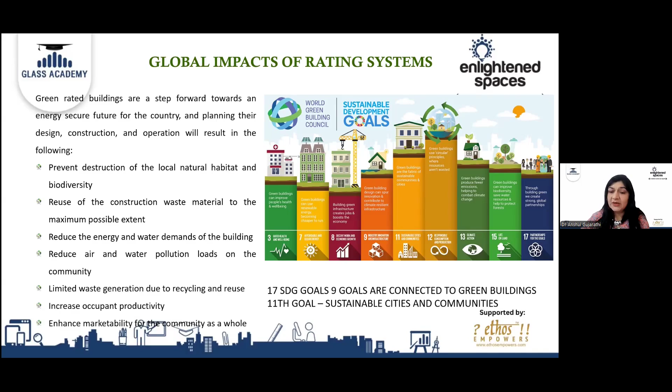Of course, the consumer awareness and demand is going very high, and we have technological advancements. Of course, the SDGs all set and remind us again and again how we have to go about it. I'm glad that many industries and corporate sectors are now directly getting engaged with registering individual SDGs and working focused on them. If we just browse through 17 SDGs, 9 of them are directly connecting to green buildings and infrastructure, wherein sustainability lies as one of the major goals.

Going further, we realize that there are some long-term risks also associated with the development, and it's not relating to one or two, but it's a multi-stakeholder risk that has come up. Amongst that, the environmental risk remains as one of the major ones, and we are actually facing extreme weathers. We are realizing disasters, which are natural and few man-made as well. We are anticipating a lot of biodiversity loss. Along with that, I would say the risk with technological advancements are also coming up and surfacing a lot.

We have realized water crisis in past few years, and now it's going worse. We have some kind of governance issues also coming up. And of course, economy is getting hurt because of this and coming up as a bubble. So looking at all these long-term risks, we really have to gear up for the challenges that are coming up.

And we were once upon a time, yes, I am mentioning it, once upon a time, we were talking of 1.5 degrees, climate change, climate reversal, and all these kind of things. Today, we are talking of 2 degrees, 3 degrees, and even 4.5 degrees. If we see COP29 coming up with certain things saying we have to be bold on buildings, do we actually realize how and where we are leading to with our technological, technical, and construction advancements?

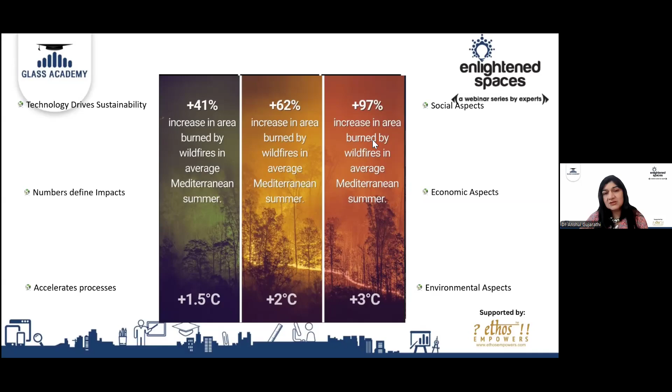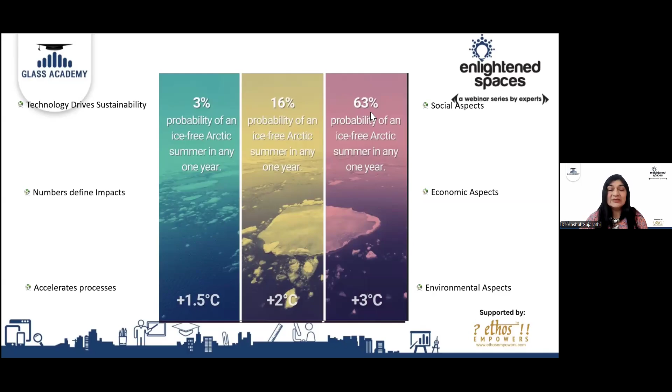And with all these numbers, we are going and racing with AI, where technology is not only driving sustainability, but it is also giving us certain numbers which are defining the impact, which is accelerating the process for certain efficient aspects, or maybe giving us the right roadmap. And we often realize that with AI coming up in a big way, we are still working on social, economical, and environmental aspects and talking of sustainability in a smaller way.

It's time for us to go from macro to micro and vice versa, from micro to macro. And of course, taking the tech-driven change, reshaping the industries, we have to drive sustainability in the most transparent way.

Friends, when we talk of sustainable development, we are talking of balance. Balance between social, economical, and environmental aspects, minimizing the impact. Every small development we are doing, we are actually creating an impact. Energy efficiency over the entire life cycle emerges as one of the major and most important goals of sustainability.

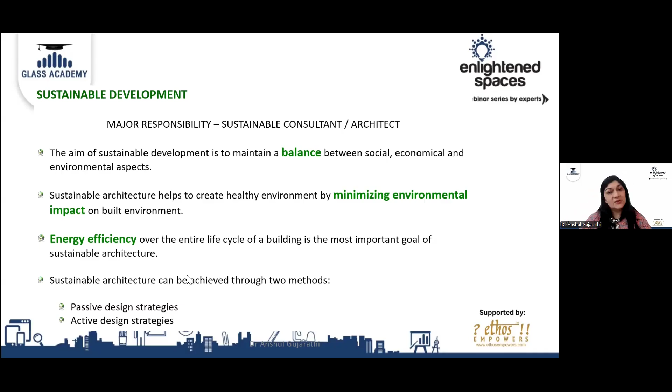And that is why we have to look at a long-term perspective and impact with sustainable strategies, including passive as well as active design and technological and services aspects. When we are talking green building, we are actually looking at minimizing the impact, energy efficiency, reducing energy, water, and managing them to the best of it.

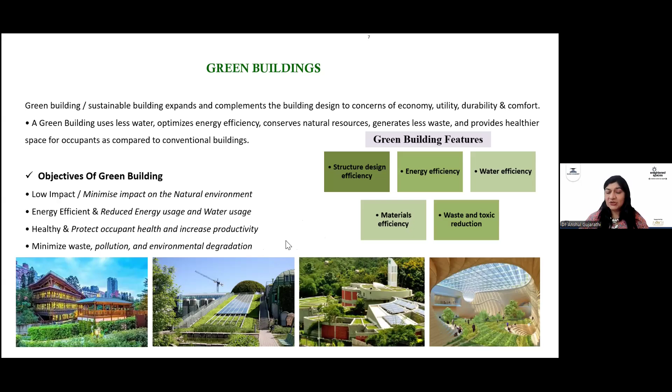Of course, talking of health, occupant health with enhanced productivity for all typologies, minimizing waste, pollution, environmental degradation, and of course, we are aware that green building works on basic 5 principles, which are very much correlating with our 5 elements in nature.

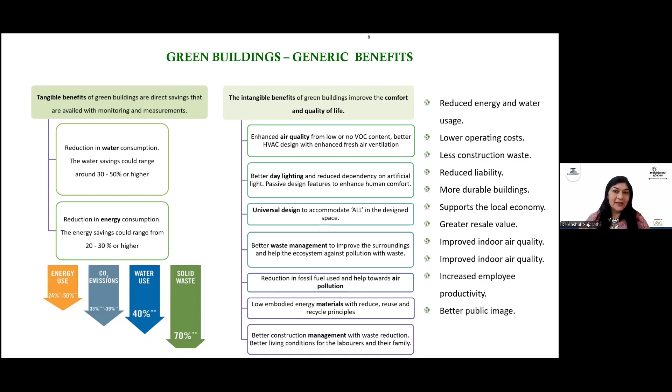Talking about the tangible and intangible benefits, we are realizing the tangible benefits with baseline consideration for almost every green building having minimum or mandatory requirements and compliances. With these mandatory compliances, we can actually anticipate a huge change. Friends, we just cannot take a building which is not sufficing even 20% saving of water. It's today a sin, and we have to take the risk of going beyond our comfort limits.

So India is pledging carbon neutral by 2070, and we are working for it today. We have worked for it for two decades, if I'm not mistaken, but with the race to go carbon neutral, we are looking at a very good roadmap. And of course, it's not we alone doing it. There are many other countries following the same pattern. It's not only construction, but as a whole, the corporate sector has geared up with their company's vision and mission, going towards ESG on a larger scale.

So we have been talking carbon footprinting, supply chain sustainability, certifications, net zero, green pro. We are having ESG reporting with BRSR, sustainability reporting, annual reporting with numbers known to everybody, life cycle analysis, and much more to go ahead with. So when we talk about all these ESG criteria, they revolve around sustainable basics, and environment, social, and governance aspects are concerned in totality. So you cannot be sustainable by just doing one part. You have to look at an integrated approach.

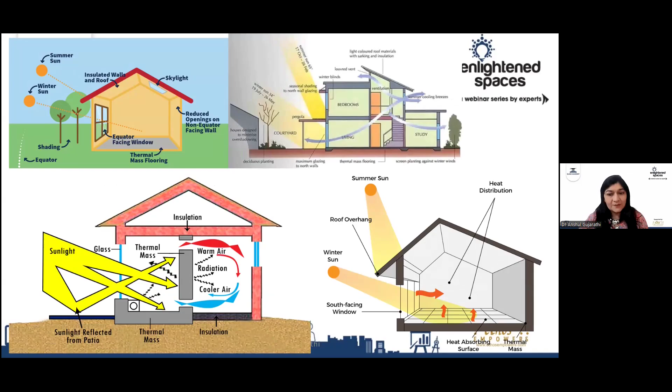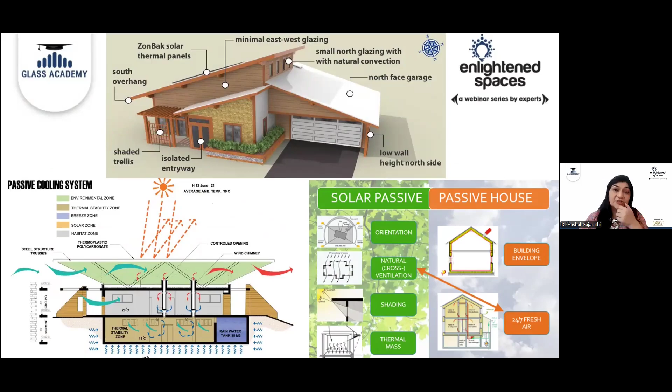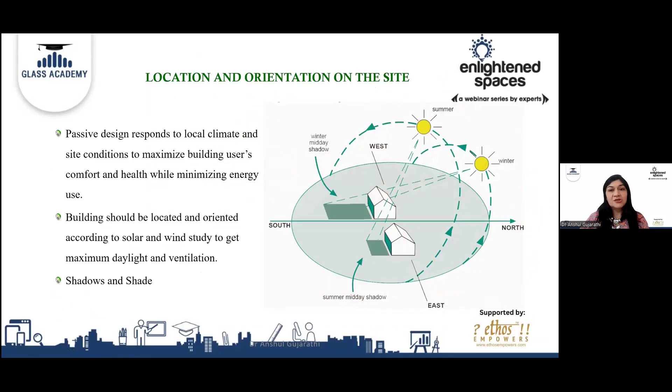Talk about how the sun is moving, how your overall passive cooling systems are designed. You're talking of how your buildings are being shaded with the right envelope, and of course the psychrometry that comes along. When we talk of location and orientation, it's important to understand shades and shadows because they play a very important role when it comes to envelope design. Strategies like courtyard planning, shading devices and others play a very important role, followed by cross ventilation, which makes a good effort for heat transfer as well as giving the right air changes for a comfortable space.

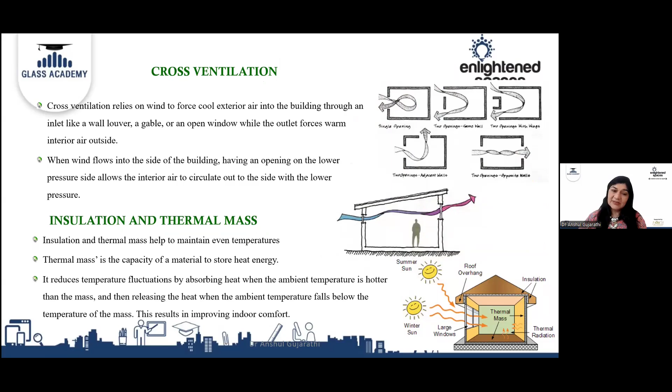We are talking of insulation, thermal mass, and many other things, for which we realize that one of the major materials responsible for giving the right connect to nature, the right approach to the envelope, a modern look, and also a material that is not only transparent but gives the right insulation indoors and outdoors - yes friends, thus glass becomes one of the very important materials we need to discuss. Glass has its own important aspect when it comes to solar passive design as well, because the envelope, which is not only leading to efficiency and comfort for the relevant climatic condition, is also creating the right connect for the end user or space occupier.

Because we just cannot live in silo and cannot have a disconnect from the environment, green building design and the right materials can be looked at to create the power of design. Architects, it's time that we look at uniqueness, functionality and purpose, along with moving away from stereotyping our structures. We all want the right satisfaction realized by the end users and our clients. And hence, if the structure is also cost effective - it can never be cost intensive if we are talking sustainability - and has the right happiness index, it will be long term effective.

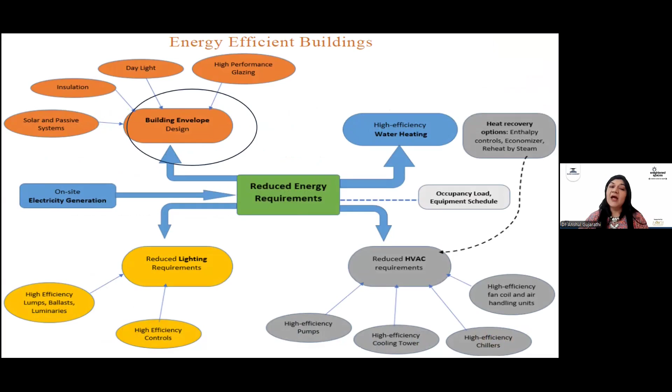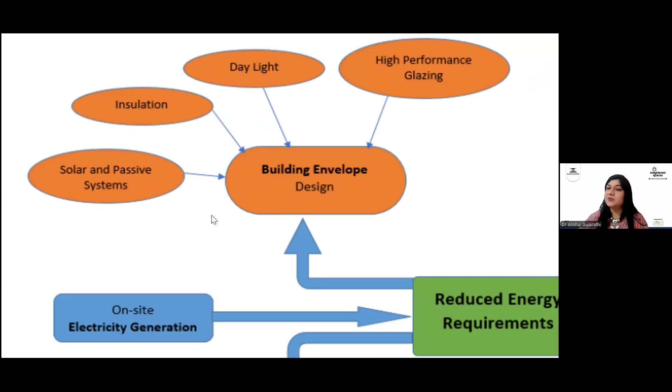Talking of building design, friends, when we are talking building envelope on a large scale, we are actually talking of four major elements associated with it. We are talking of insulation. We are also talking of daylight. We are talking of high performance with glazing and the opaque envelope, or the skylights that are there in the structure, and of course the solar passive and overall electricity generation in case if it is happening through the passive systems.

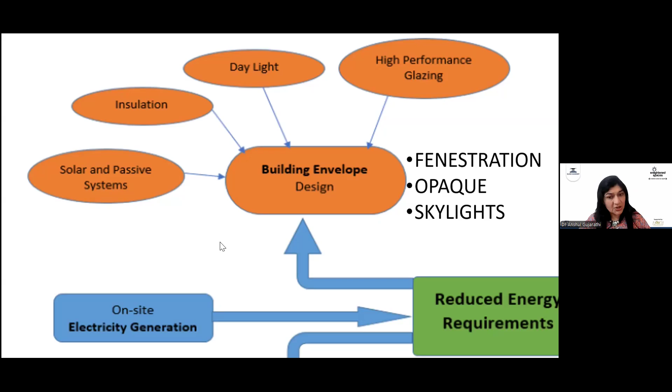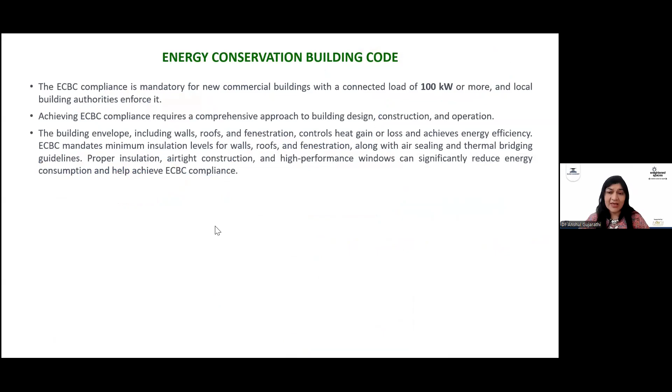Overall, taking into account all these factors, we can anticipate the right energy requirements for the project. When we are talking of ECBC codes, their compliances, or ECSBC codes, their compliances, we realize that building envelope also forms one of the major aspects in terms of overall energy efficiency. There are certain numbers which are predefined in the code. I would definitely love to also talk about ECSBC sometime soon, but for this, I think we can just continue with ECBC.

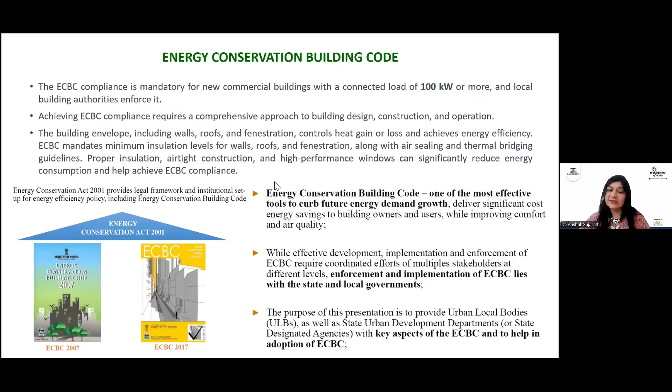It becomes one of the most effective tools to have the right compliance coming for the right climate. Also, talking of passive design features, including renewable energy system into the overall envelope also makes a huge difference. Today, we are having structures which are having PV panels embedded in the envelope, which are acting multifaceted. Of course, we are having also PV panels which are generating from two sides, and that is how they are also taking the right change with the technological development while we are exploring to use them the right ways also in the envelope.

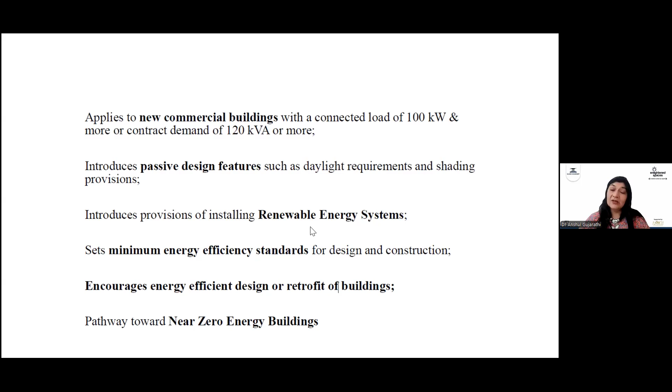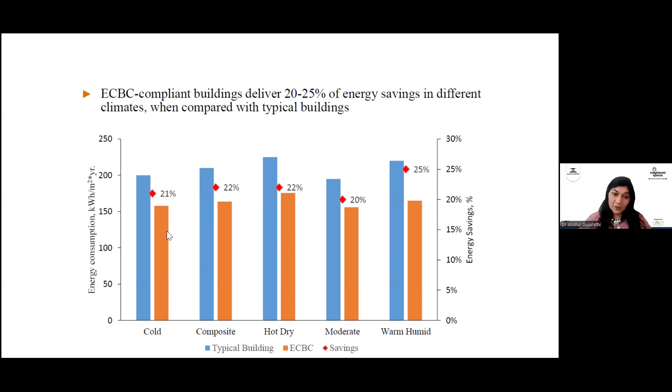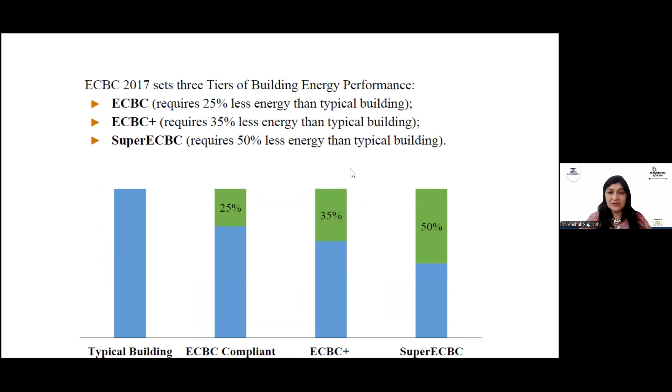This particular graph determines different climatic zones and how the ECBC compliant buildings are delivering the energy efficient way with the right reduction in percentages. We can also see that ECBC, ECBC plus and super ECBC requirements in terms of energy savings when it comes to typical buildings or the conventional buildings. So yes, taking the right compliances and choosing the right materials can give us absolute wondrous results.

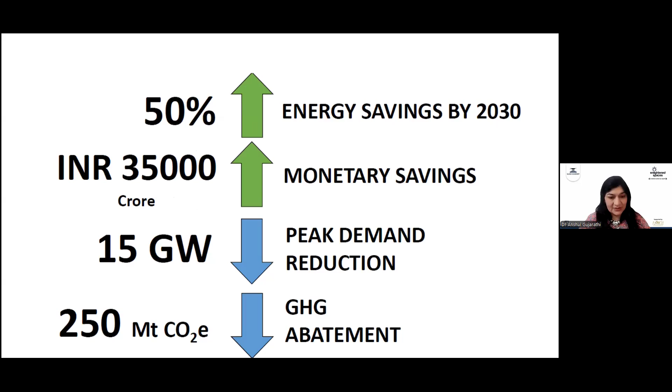And if our buildings decide to go ahead with that, we can anticipate a huge chunk of energy saving by 2030, which can go up to 50%. Of course, some kind of numbers are associated with it in terms of monetary savings, peak demand reduction, and of course, the GHG abatement. It's a voluntary rating program, and there are other certification programs which are directly taking ECBC as a base for their own compliances. May it be GRIHA, BEE star rating, IGBC, LEED, and even ASSOCHAM GEM for that matter will use ECBC as a reference code.

Coming to the very important and most aspired material, glass, and talking to it in the Indian context. Friends, when I was told that I have to give this seminar also touching base upon ECBC and also talking about glass and retrofits or even the use of glass in any new project, talking of phases of design process, I found this very important and interesting study during my PhD.

It was realized that the level of design effort with energy and cost division is very, very low at the programming stage, while it is maximum at the occupancy stage. But the potential of saving in terms of cost and energy is very high during the programming stage. If this is done the right ways, occupancy stage cost and energy saving reductions are realized to be very, very low. And that is how you end up giving a lot of saving potential. So the potential goes down as you delay your overall process.

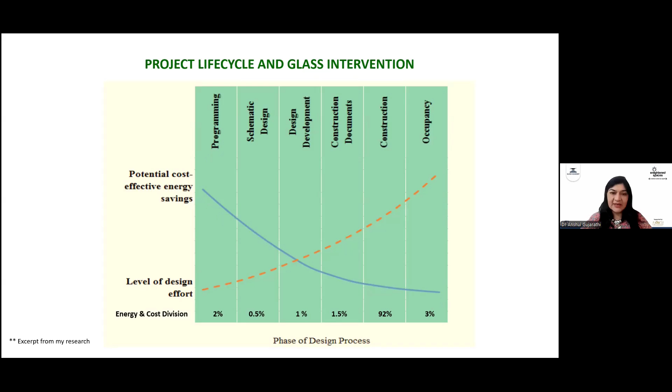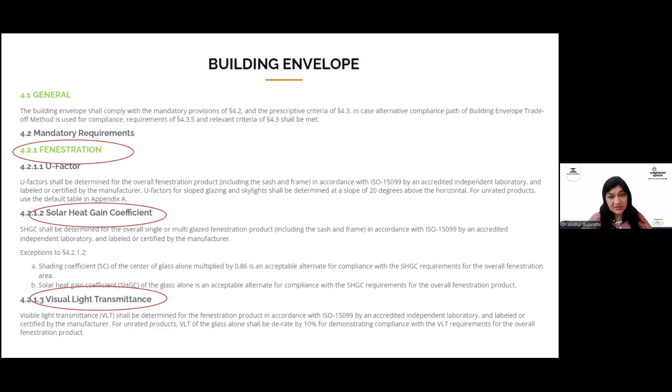Also, this has been highlighted in the ECBC that when we are talking of the material glass, we have to look at solar heat gain coefficient. And when we talk fenestration, SHGC and VLT play one of the major roles in choosing the right glass for the right project and the right level of the project height.

We often confuse that if the project is having ground floor glass application, maybe we use a simple glass not having the right VLT because probably sunlight will be a very difficult task to reach that place. So we are aware that we are designing in the wrong ways. So friends, it is important that we have the right angle, and I would say the angle of obstruction has to be realized right at the design stage for all buildings. Each and every window or the fenestration has the right for sunlight to come in.

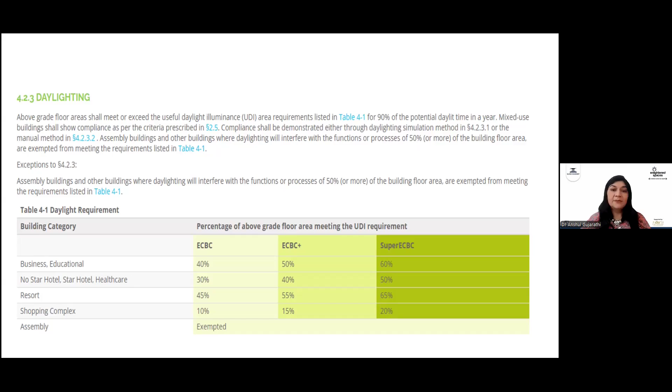And definitely it's a good idea to use different kinds of glass in different faces or different levels, but it should also match your compliance aspects for the project. So friends, taking the right SHGC and VLT for the right climate and the right project will make a very big difference. I want to share a very interesting case study here, which is associated with a retrofit case.

This building is a very well-known building right at the heart of Shivajinagar, Pune - Lokmangal building, which is nothing else but Bank of Maharashtra. So every person entering or leaving Pune knows this landmark because it has been a pickup point for travelers for a very long duration. This 46-year-old structure is now a green landmark.

When Bank of Maharashtra decided to go for a retrofit, they wanted to retain the identity of their building. And that is how they always remained with the same type of envelope. The design should not change, the identity should not change, but they would definitely make a landmark building because the inner side of the building, the indoors, would actually define the greenness of the project.

Today, this IGBC Gold certified project has 35.45% annual energy savings, out of which 42% of the entire connected load is coming from solar energy generation on site. The solar PV panels, installed on the building terraces, are actually doing the magic.

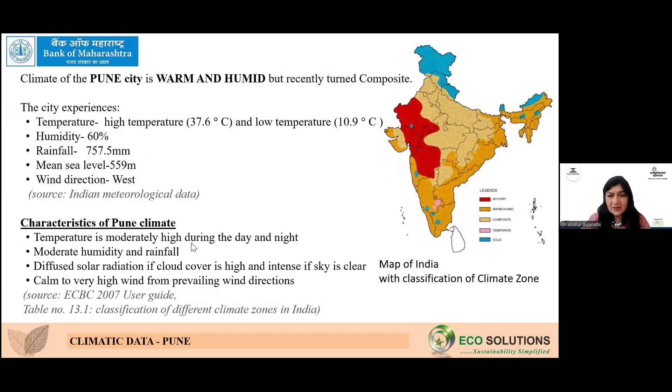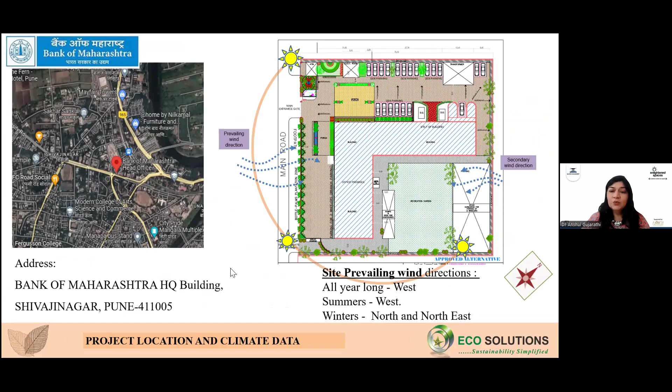Talking of the Pune climate, yes, we did a lot of study. And with that study, when we realized that being the main road, we have to understand how the sun is actually moving in the entire campus. So sun path analysis was done, wind analysis was performed, and with all these base studies, the overall envelope of the building was designed with certain strategies that were adopted.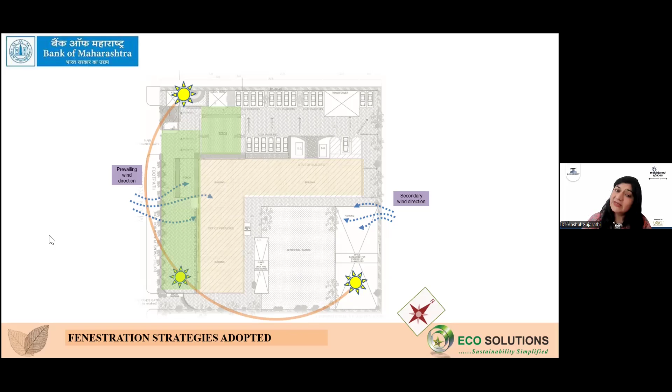Considering the prevailing wind directions, certain vegetation was proposed. It was not possible for the team to actually plant trees because it was a constructed site and they had limitations. So they went for very huge vessels to plant the right amount of trees. The construction area remained the same, but it was designed to have the right landscape at the entrance area with green patches to control glare as well as dust coming from the main road.

This side glass, coming from the roadside, had minimum glass, and noise barrier was one of the major aspects, and the glass chosen was with low VLT. Because the visible light transmittance coming from this side was not required looking at the inner activities as well. They have a major atrium here, and they have connected this atrium to the abutting landscape in the right ways.

Another section where they did not have the sun causing the right impact - the west side, I would say, the glass chosen was with high VLT and maximum glazing is realized on this side. Even the chairman cabin and managerial cabins have L-shaped glasses, and this entire zone has the right use of glass with maximum VLT coming in.

This side, which is the northeast side, to be precise, they have another construction activity going on, and the land is also occupied, so there was no view possible, and due to the adjacent building, high VLT and vision barrier is also created. But of course we need good light also coming in from this side, whatever possible. We have this parking area designed in the northwest side, and that is why this is a low-heighted area, along with some kind of ingress for light possible due to the gap.

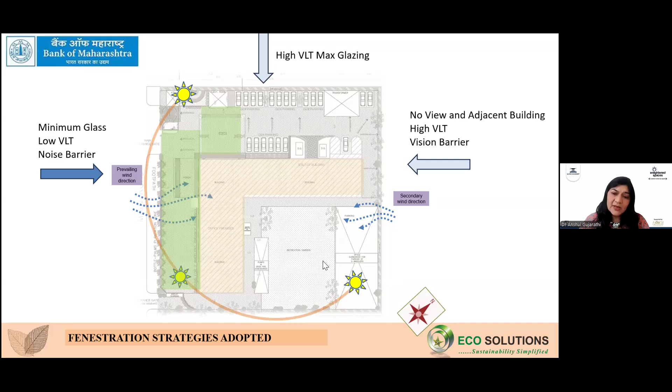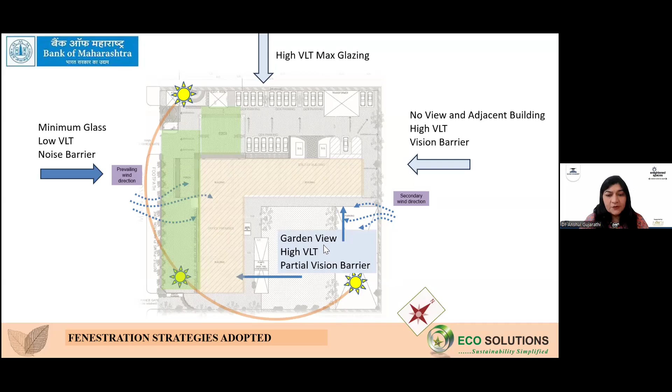With this, the northeast side also has a lawn, and that is why high VLT glass was utilized so that maximum light can enter the spaces for daylight and good working. So garden view with high VLT and partial vision barrier was chosen.

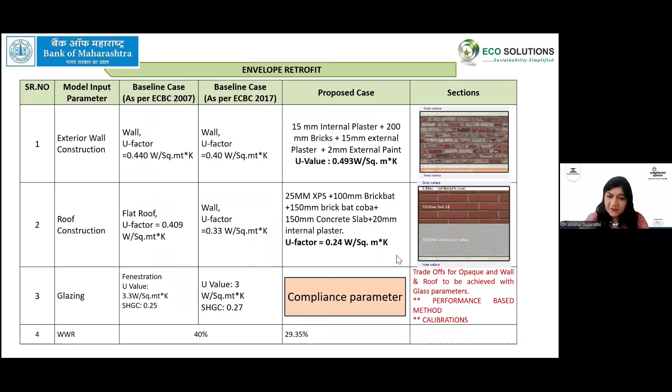With the right approach in the choice of glass, we were having compliance in terms of glazing for the proposed case, and we could score a good amount of energy savings against the ECBC baseline in terms of IGBC EB as well.

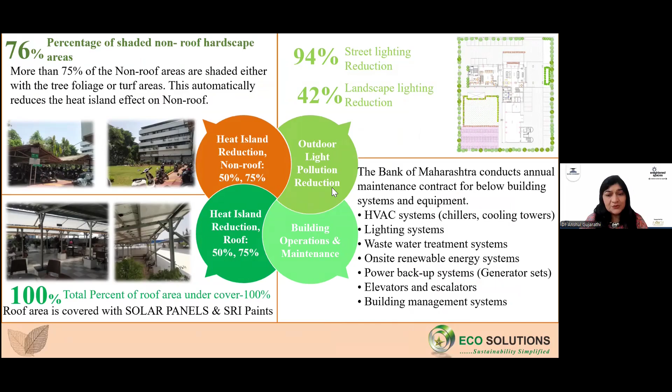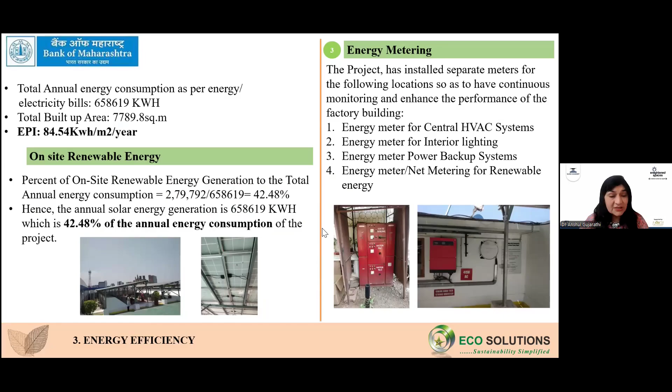A few other strategies we had: heat island consideration for roof and non-roof areas, outdoor light pollution reduction, and building O&M, since it's an occupied building with ongoing strategic working for many years. The EPI was realized, on-site renewable energy was realized, and we have a good metering system for overall monitoring.

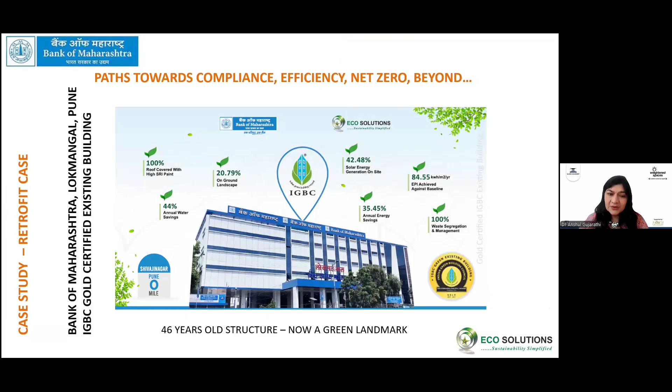Yes, the building is now all set to go towards net zero and beyond zero. Looking at all these factors, when we talk of a green landmark, we realize that glass makes a big difference in the overall design, and that is how the right credentials are achieved by the project.

So this is an IGBC Gold existing building, having good green features rightly displayed in the overall process. Apart from all these things, an ongoing thermal comfort survey for the occupants is a regular practice.

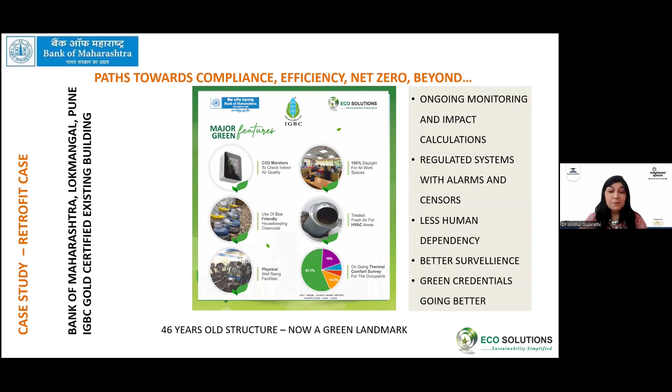There were additions of treated fresh air units for HVAC areas, and CO2 monitors to check indoor air quality as well, and lots of other things with less human dependency, better surveillance, and good green credentials going towards betterment were realized.

So friends, definitely technology brings tangibility to sustainability. And when we are retrofitting, it was realized that technology can also help us create a better module.

Let's see, when we talk of technology also creating better help, we ideally have started defining our paths with projections. We are going ahead with projections, and technology is aiding a faster path to our sustainable aspects.

Technology, in terms of using the right software to give projections, giving a systematic approach with monitoring, digital decarbonization, tech accelerators, and advancing the sustainability goals, all with various products available in the market, giving us the right numbers with CO2 reduction and different monitoring aspects.

All of this, we realize that we can today make a digital twin out of our physical twin, and represent models and manage not only our data, analyze them, but also do the corrective actions.

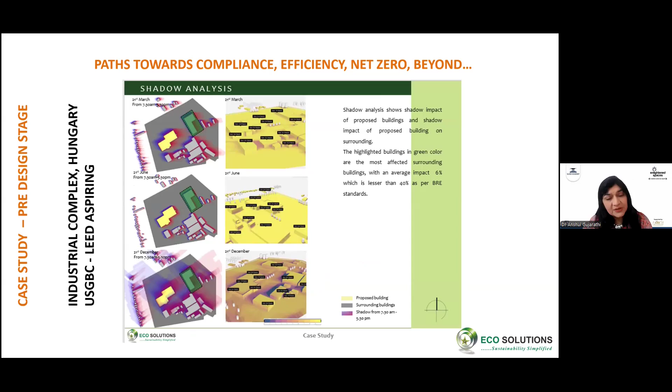So the challenge remains here, and we started with shadow analysis, not only for the new project but the existing buildings as well. The shadow analysis actually gave us the right application strategy for the overall new building, as well as retrofitting for the previous campus buildings to have the right type of shading strategies for this climatic zone.

Apart from that, we did certain wind analysis wherein we could understand that in this certain climate, we need winds from these sides to support our structure.

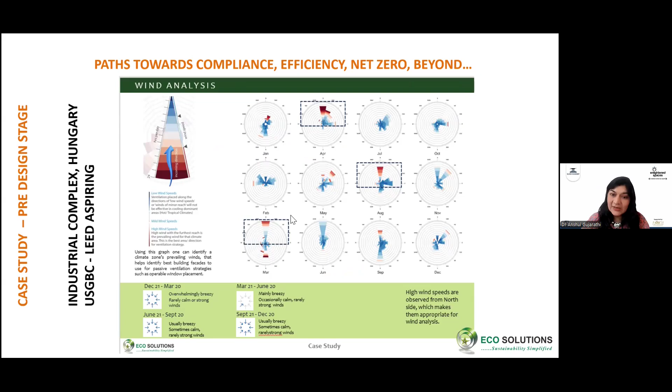Being a manufacturing unit, we had a lot of limitations when it came to overall use of winds and air changes. So ventilation was designed with the right aspect, understanding the overall wind movement in the overall process of the campus.

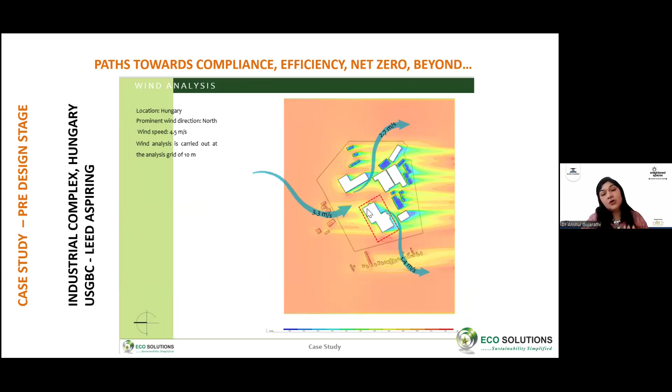And when this was done, prevalent or prominent wind directions, as we identify them, were taken into consideration. We did propose certain windmills also, which were permitted in such kind of zones, and we could actually analyze the renewable aspect for wind as well as solar in this particular project.

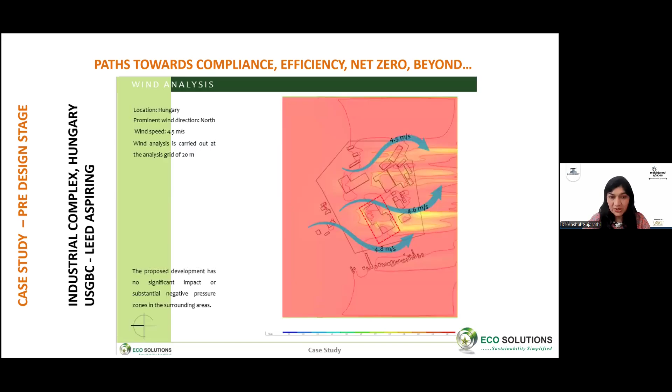Taking daylight into consideration in depth, we had to take up individual spaces, their activity requirements for daylight, and accordingly the lux levels were defined and designed.

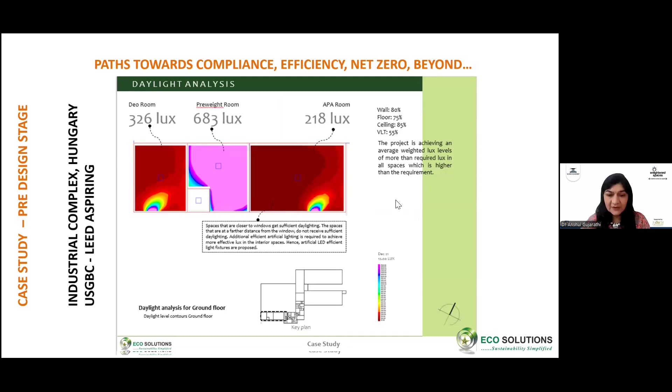Taking urban heat island into consideration, the Universal Thermal Climate Index was studied, and we could actually identify the overall reduction in site temperatures. So friends, being in our country, we often talk of reducing temperatures to attain the comfort zone. But going into other climatic zones, we also need to understand whether we really need to only reduce the temperatures, or balance them.

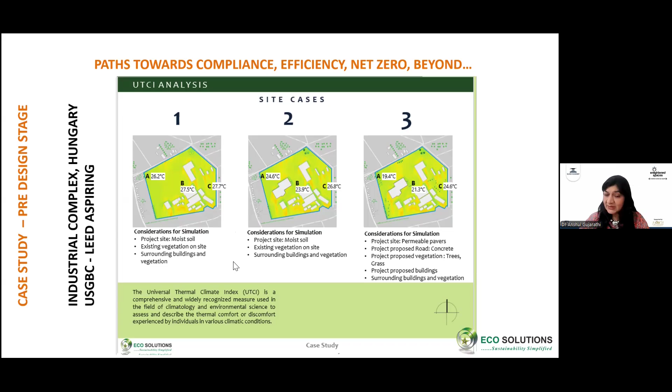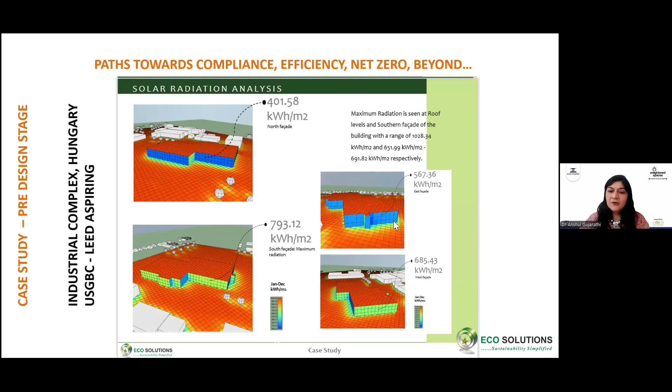This challenge remained to balance the temperatures in this overall campus. Hence, land planning strategies also came into picture here, and they were studied with the right aspects. Talking of solar radiation analysis, which was performed so we could suggest the right envelope for the overall new building as well as retrofitting of the old building.

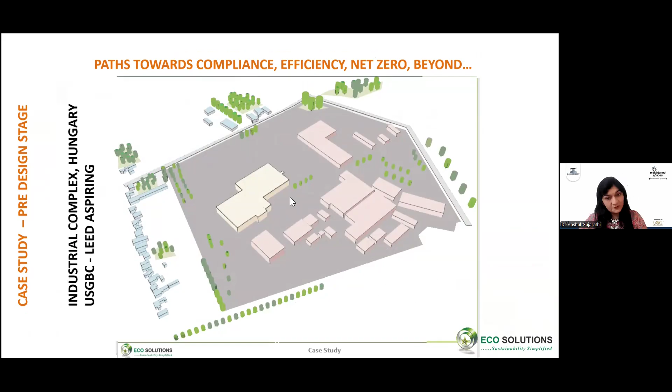It was studied with the overall performance of this particular simulation software. So friends, taking this project further, we realize that the overall campus can give you a very efficient working when it takes the right glass into choice, and the overall material aspect is also looked into, giving a perfect envelope.

As we continue to the next interesting project, one project which started as IGBC new buildings did not have enough amenities, and that is why they lost the platinum rating and landed in gold rating. But the clients were never satisfied. They said, let's wait for a year and go for existing buildings with platinum. And not only stopping at platinum existing buildings, they are now on their journey towards triple net zero. They are on their certification journey for triple net zero, but the project has been running triple net zero since its inception.

Location is in Pune, not a very huge project, but handling a very important logo with it. It's BMW Service Center by Bavaria Motors.

The energy consumption reduction, only through solar passive design and right choice of glass, was 20%. Water consumption was reduced by 60% against the baseline. They don't take any water from outside — it's a well which actually gives water to the project, and the well also recharges and soaks back the water coming from the rain.

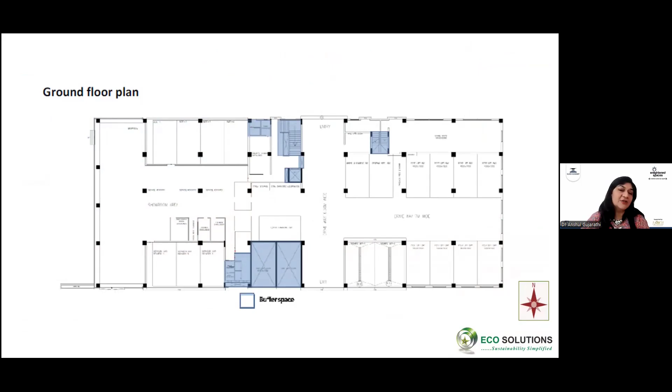Talking of their ground floor plan, I'm trying to highlight how glass can take a big leap in the overall design. A few activities that were planned which required air conditioning were actually on the west side. With this, we decided spaces in the south would be semi-air conditioned, or mixed mode ventilation.

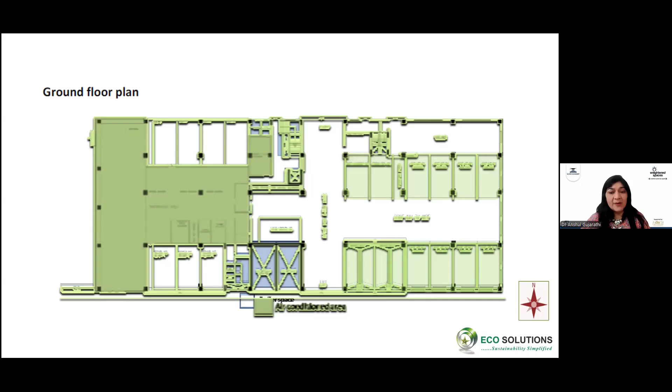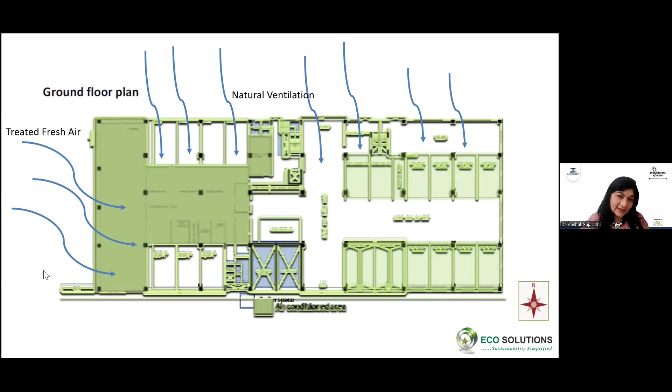Apart from that, looking at air movement in the overall project, there were treated fresh air inlets given from the predominant wind directions, and natural ventilation for all other areas was well designed. When talking of natural ventilation, there was ensured cross ventilation also happening with area divisions.

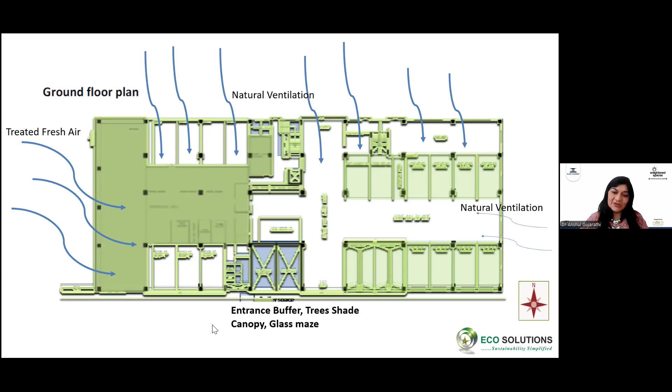Entrance buffer, tree shades, canopy, glass maze — these are a few important strategies when it comes to solar passive design for this project. This important elevation was created with a maze of glass having different emphasis.

As we go to the elevation side for G+2, there were different zones in the overall project — HVAC zones, shop floor, service floors for the cars, and some were just parking or treatment in terms of grease working or automation working or something like that.

So this entire project was divided into zones, and according to zones, wherever HVAC zones were there, glass with low SHGC was used, where VLT was slightly reduced. While the shop floor, parking floor, or service floor, where there was no HVAC and only ventilation was prevailing, the VLT was made high for that particular glass.

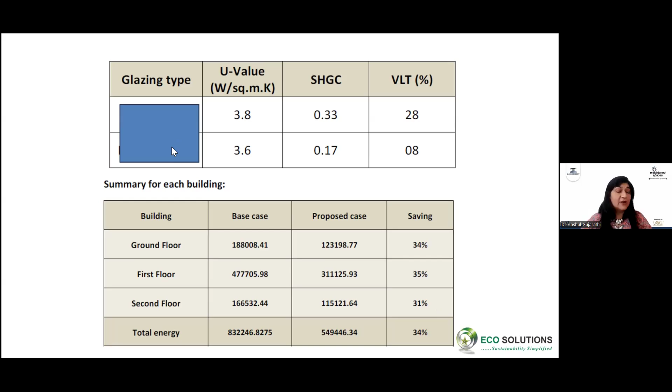If you see the overall use here, the glass elevation was used with emphasis consideration. A very prominent company's glass was used here — I cannot take the name, but I have mentioned the SHGC and VLT. You can see the reduced VLT for the glass, and the overall summary that was performed before designing this building. Anticipated 34% savings were realized with the use of the right glass and the overall solar passive design aspect.

If we see the investment they have done in green features, including the renewable energy, this sheet plays a very important role because the building is operational since June 2017. With the renewable energy and 100% of units going with renewable energy today, the project is energy positive — meaning it's generating 1,800 more units per month since August 18, and there's no bill for them for a lifetime.

So coming to that, it was a 55-month payback period considering the STP as well — 45 months for surplus energy production, approximately 4 years payback.

From June 22, the project is cost neutral and energy positive, ideally a net zero project for energy, water, and waste since 2019. And yes, the developer is still looking for scope for improvement. Such projects actually create a good landmark and an example for many architects like us. One of our finest and esteemed projects, this is BMW Service Center by Bavaria Motors. Two certificates for the project, though one is not being displayed here.

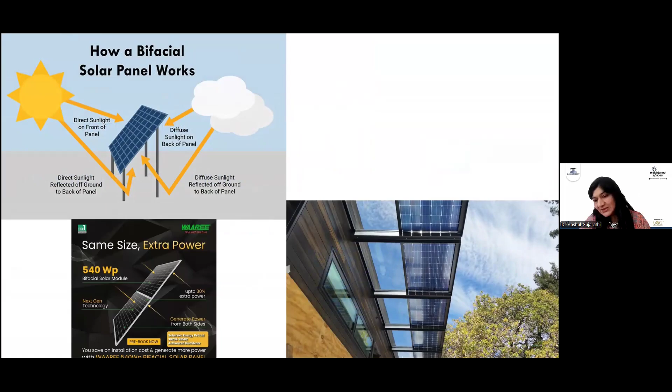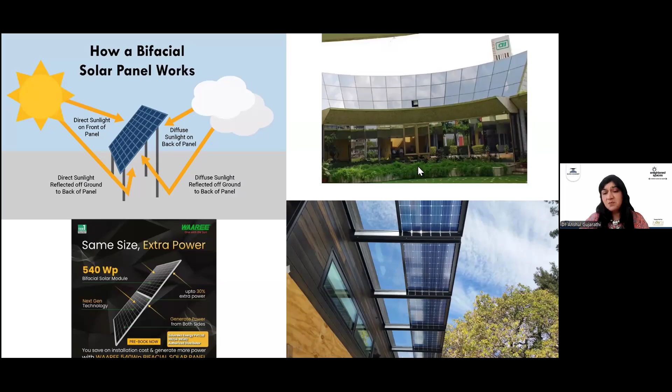Talking of PV, I'm glad to share this picture here, which shows a two-sided PV generation module. It's a very nice way of actually depicting solar PV and having the same utility of space, same kind of impact, but enhanced generation. Our CII building in Hyderabad displays double-sided PV generation modules, and that remains one of the best examples in the country when it comes to any green building or net zero building as well.

India's first net zero project, which has a complete circle and also tries to integrate solar PV in the envelope, remains CII Hyderabad. Friends, this building is a landmark and quite open for everybody to see. My special appeal to the students: if you are going to Hyderabad, please make it a point to visit this place and have a detailed look around. It's the Green Business Center by CII Godrej.

Talking of technology support once again, renewable energy does not confine to solar PV and wind, but it also extends to another set entirely, and should be explored to the best possible extent in your project, as and where feasible and applicable.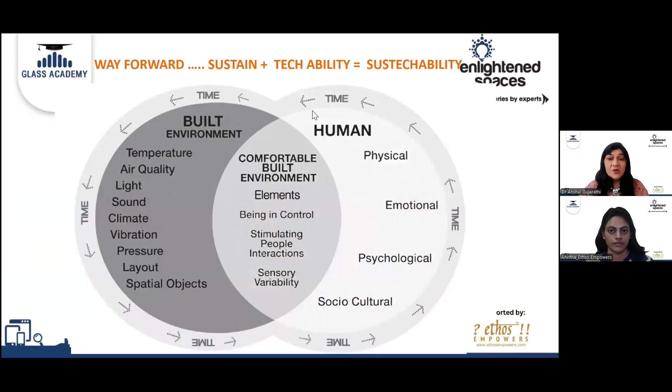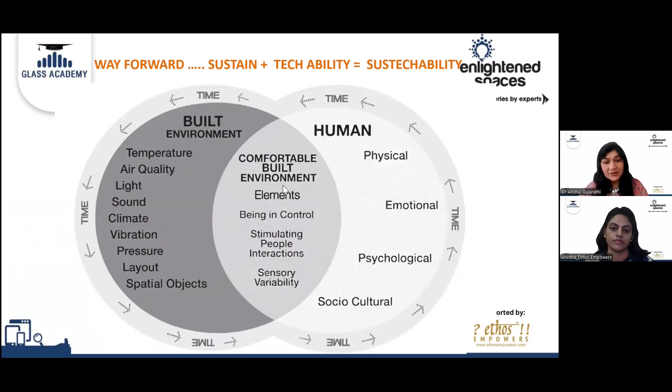Friends, it's an important way forward. We have to talk of sustainability with technology. We are looking at the built environment, the human environment, and comfortable built environment aspects we should never neglect, because another important factor, time, also plays with it. So friends, build a comfortable environment, consider time as an important element, be in control, stimulate people, and look at all the possible options where you can create the best possible efficiency.

Looking at the trend for architects and designers, sustainable design is an approach that connects building occupants more closely to nature, and that is how biophilic designs are also coming up as one of the major aspects today. Having a resilient approach, consultants and engineers, we have to look at nature to resolve our service related issues, because nature probably gives you a solution for almost everything that is available to us or that comes up as a challenge. We all aim to fight climate change, pollution, reduce carbon dioxide emissions, help counteract loss of species, support organic ingredients, save trees, promote the 3 Rs - reduce, reuse, recycle - and overall develop a mutual enhancement for the human-earth relationship.

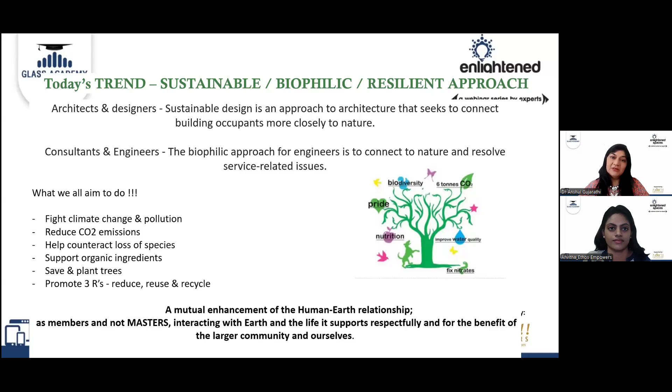With this, now it's time to go net zero in terms of water, energy, and overall impact, and of course, waste also coming into the picture, talking of net zero carbon. And when we talk of all these aspects with sustainability - social sustainability, economical sustainability, environmental sustainability - it's also important to work with an end user focus and talk of human sustainability.

So friends, thank you so much for this opportunity. I'm glad to talk to all of you, and also mention a very important message: tangible is impactful. Thank you so much.